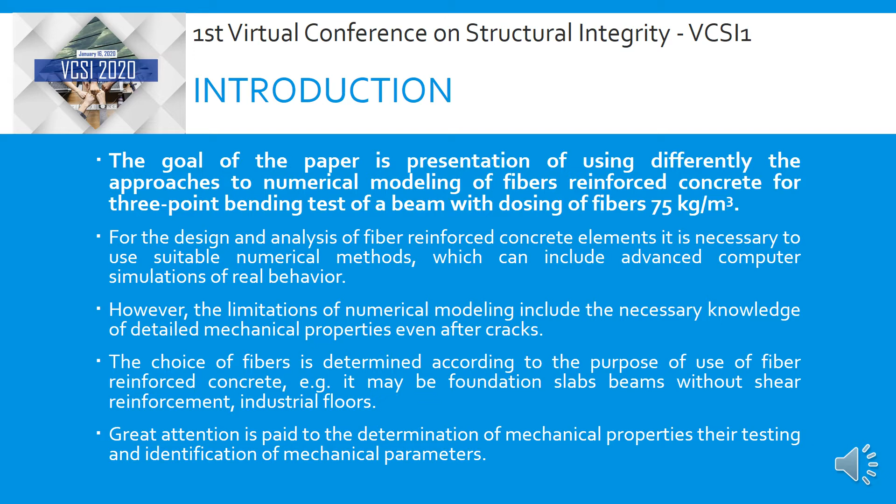The basic tested properties of fiber reinforced concrete usually include determination of compressive strength, tensile strength, splitting tensile strength, bending tensile strength, and density. Particular attention is paid to the tensile strength testing. The frequently used splitting tensile test is technically simple compared to the bending tensile test.

However, in the case of simplified designs and analysis of fiber reinforced concrete, the expression of tensile properties in the form of equivalent tensile strength is most often preferred. In the case of computer simulation, it is preferable to determine the fracture energy and a suitable idealized softening diagram.

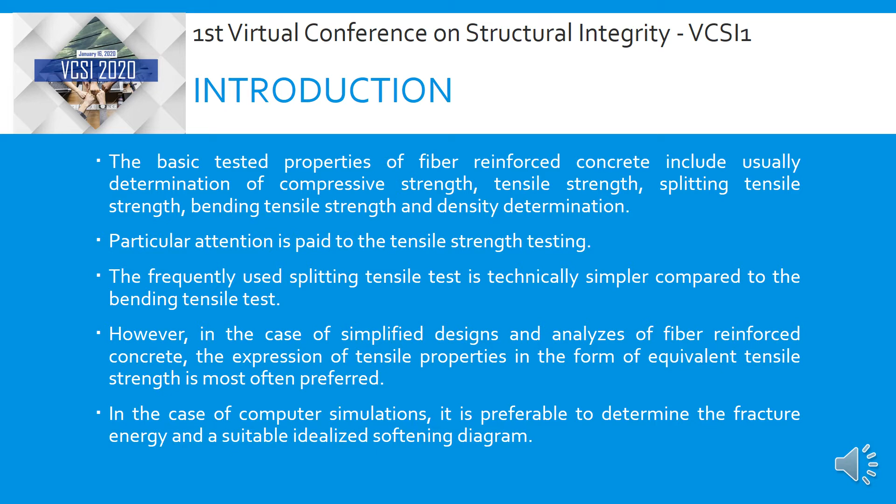For testing of fiber reinforced concrete there exist a number of recommendations, standards or design codes. However, the resulting fracture energy values are also influenced by the test configuration, for example, 3-point or 4-point, and sample dimensions. When interpreting the test results, it is also necessary to take into account that the character of tensile properties is expressed for basic types of stress: tension, pressure, shear, or torsion, for mathematical models of material.

For numerical modeling and analysis, the finite element method and nonlinear analysis are often used. The numerical method is used where a fracture plastic model and 3-dimensional models are chosen for the mathematical model of material.

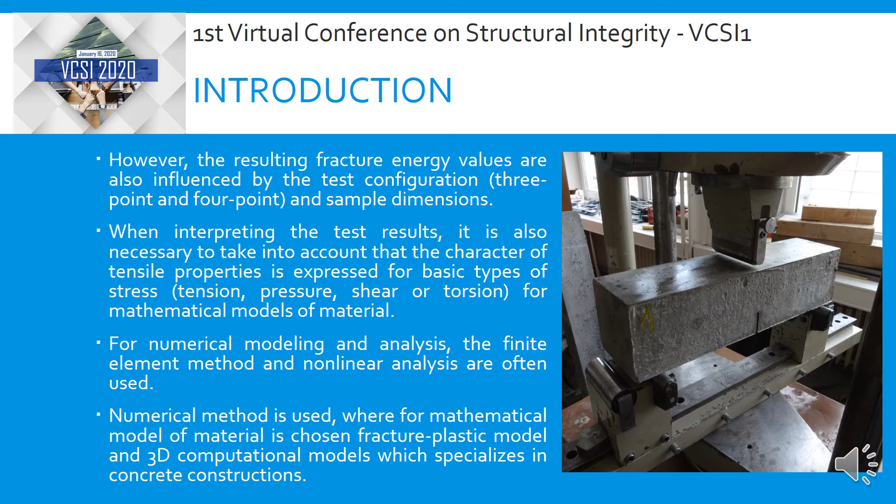The research and paper include experiments in the laboratory and numerical modeling. For the experiment, 2 series of samples were chosen, differing in the type of fibers used: Dramix with hooked ends fibers in figure A for the first series and Dramix small fibers in figure B for the second series. The test series have the same dosing.

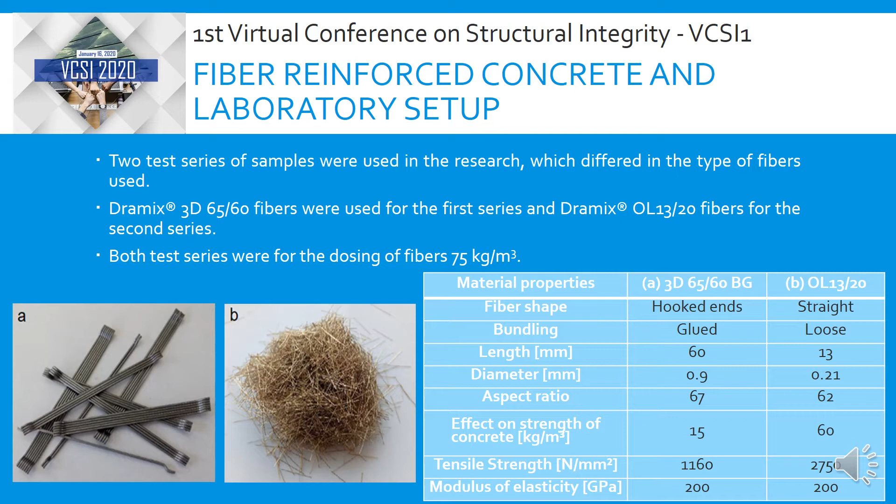The test series also have the same basic concrete matrix. The parameters of the concrete matrix are shown in the table. The concrete matrix includes cement, water, fine aggregate, coarse aggregate, and plasticizer.

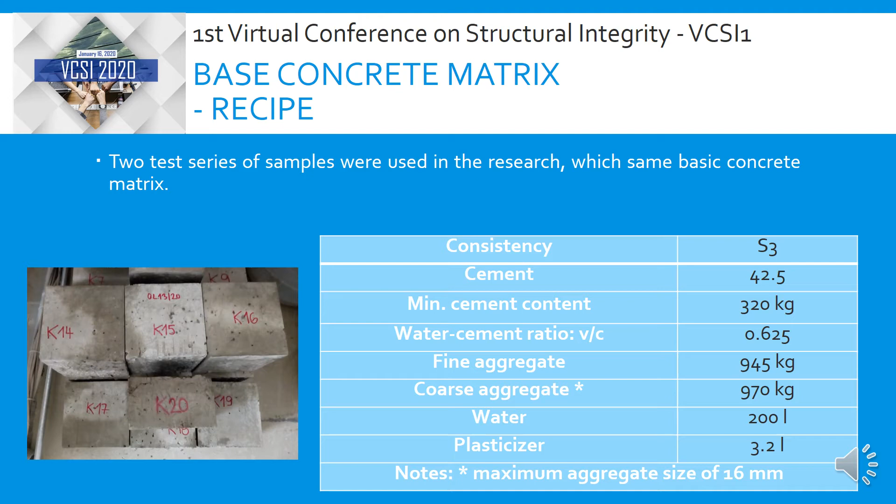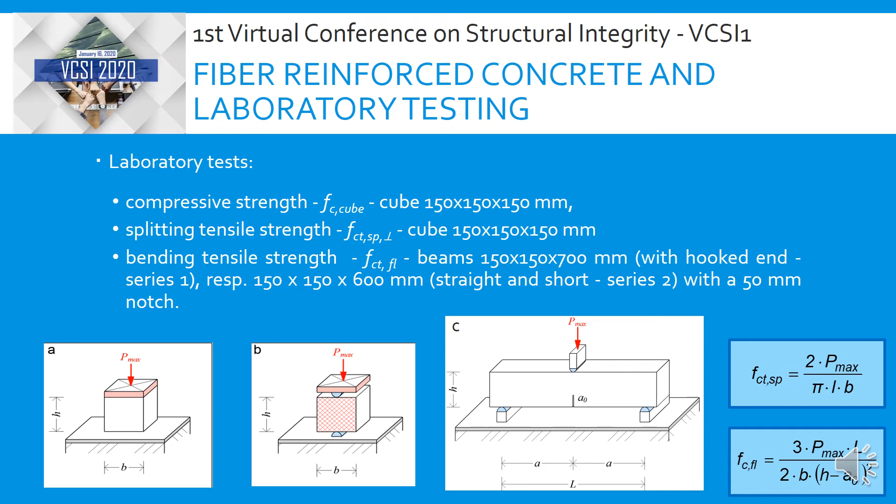Laboratory tests include compressive strength for cube, figure A, splitting tensile strength for cube, figure B, and bending tensile strength, figure C. Beams for the bending test each have a 50 mm notch. The resulting mechanical properties are shown in the table. The evaluation of the 3-point bending test also includes determination of load displacement diagrams. LD diagrams were used for numerical modeling.

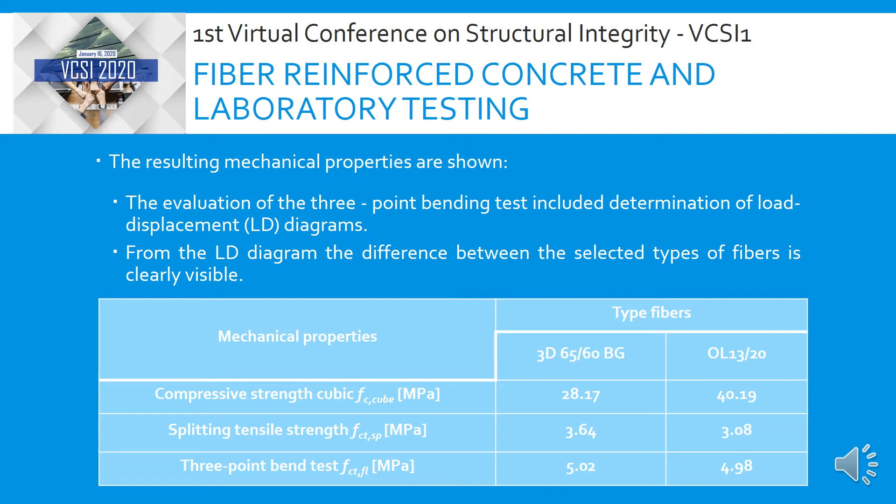For the numerical modeling, it is possible to use finite element methods and nonlinear analysis within the ATENA computational system. The created three-dimensional numerical model simulates the 3-point bending test and uses the fracture plastic material model. 8-node isoparametric finite elements were used.

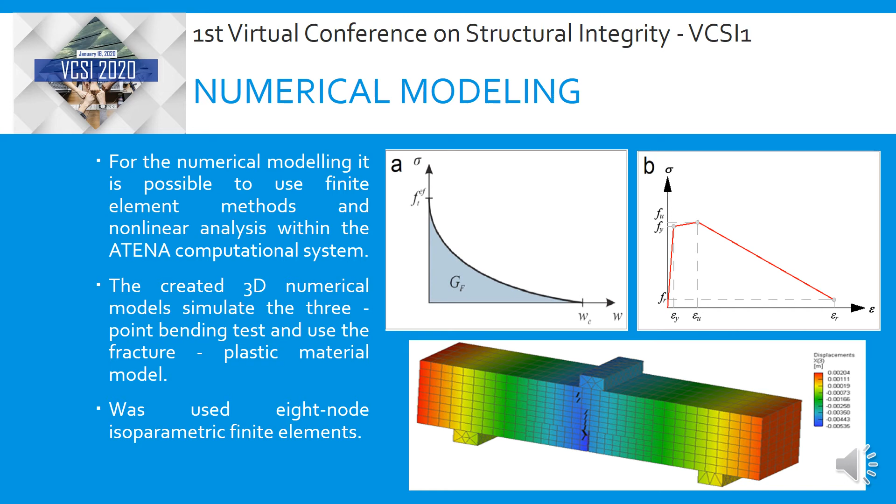The fibers were taken into account in the concrete by two concepts. For Dramix small fibers, series 2, figure B, typical concrete tensile softening was used, figure A. However, tensile strength and fracture energy were modified. In this case they can be designated as effective tensile strength and fracture energy. For the modeled case, the effective tensile strength was 0.95 and fracture energy 900.

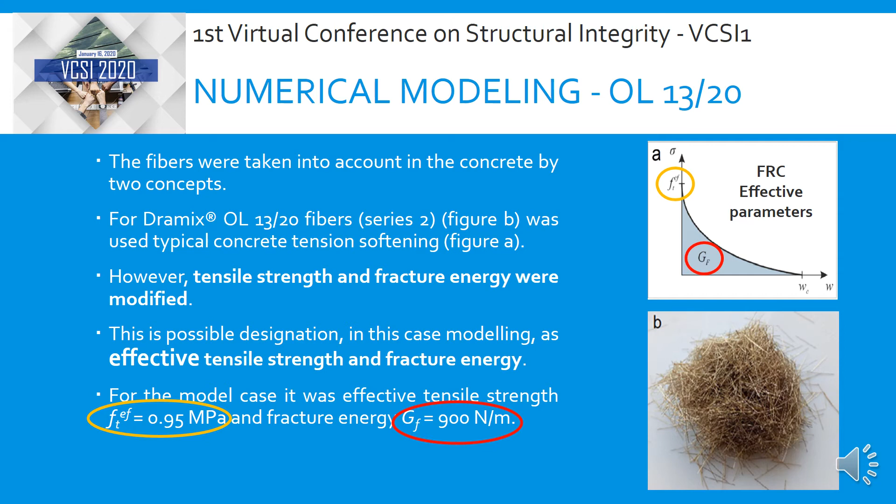In the case of Dramix with hooked ends fibers, series 1, a concept combining a smeared reinforcement model and plain concrete model was chosen. For the modeled case, the concrete input parameters were: compressive strength for cube 24, compressive strength for cylinder 20, modulus of elasticity 18.5, basic tensile strength 1.5. For fibers the input parameters were yield strength 1000, tensile strength 1050 and residual strength 100.

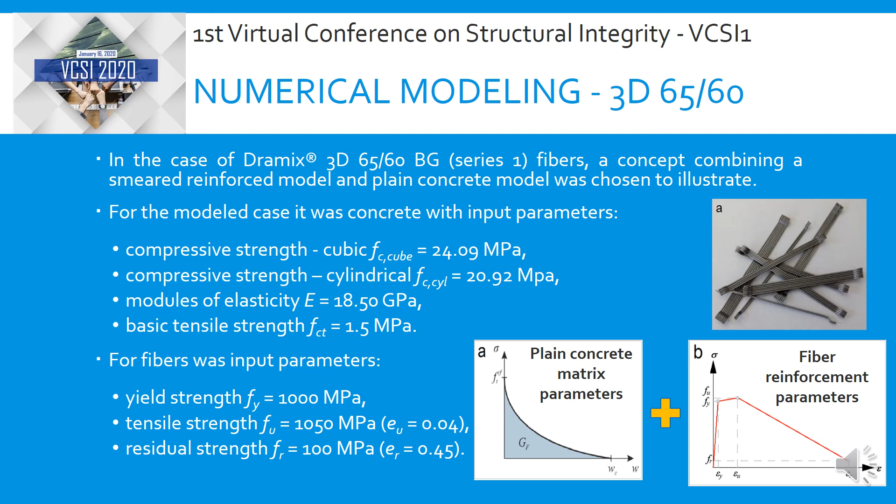The figures show a comparison of results from laboratory tests and numerical modeling. The left figure shows results for hooked fibers and the right figure shows results for small fibers. The results of the LD diagram from numerical modeling are very similar to the experiments.

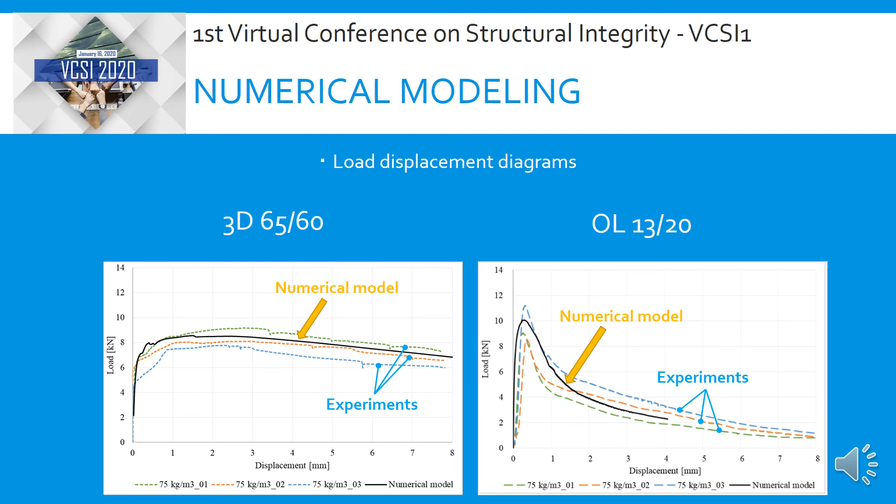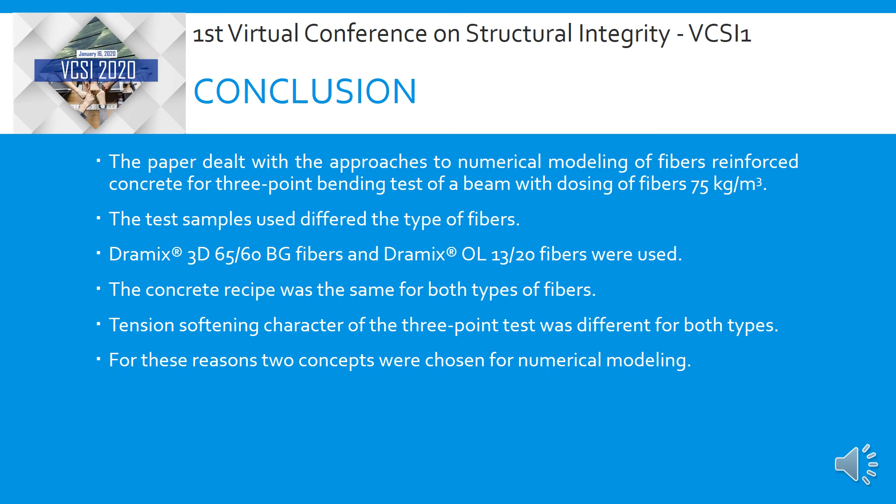Conclusion. The paper deals with the approaches to numerical modeling of fiber reinforced concrete for a 3-point bending test of a beam. The test samples used different types of fibers. Dramix with hooked ends fibers and Dramix small fibers were used. The concrete recipe was the same for both types of fibers. The tensile softening character of the 3-point test was different for both types. For these reasons, two concepts were chosen for numerical modeling.

For the case of 3D fibers, it is possible to use a concept combining a smeared reinforcement model and modeling of plain concrete. In the case of small fibers, it is possible to use a model with exponential softening for plain concrete, where the input parameters are modified to effective values.

This numerical modeling approach made it possible to get very close to the resulting LD diagrams from laboratory tests. However, it is difficult to choose an optimized methodology for determination of material properties. The authors will focus on this area in future research. Thank you for your attention.